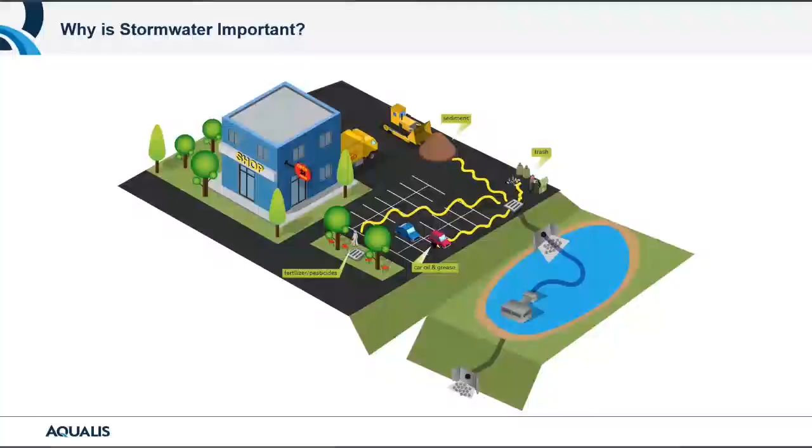So moving on, to kind of start at the baseline: stormwater regulations, what it means. This is why we're even paying attention to this. Here's a slide, an example.

Before this shop and parking lot were built, this was probably grass or forest of some kind. Whenever we disturb nature or the original landscape, creating impervious surfaces, rainwater no longer hits the ground and gets absorbed, or runs to the nearest stream, lake, or ocean without first picking up disturbed items on those impervious surfaces. Parking lots pick up a lot of oil and grease from cars, salt in the wintertime, fertilizer, and pesticides from nearby landscaping.

All of this flows downstream into our waterways and eventually gets recycled, whether going back into the water table or downstream to the streams and ponds we recreate in, or where we eventually get our drinking water from. So it's very important that we do our part, based on the design and intent by the municipalities, on filtering some of this water.

Another example here: when water hits these impervious systems, it runs into, in this case, a retention pond on this particular site. That water can get filtered a bit more naturally, then eventually outlet to the downstream river, lake, or ocean, and things get accomplished.

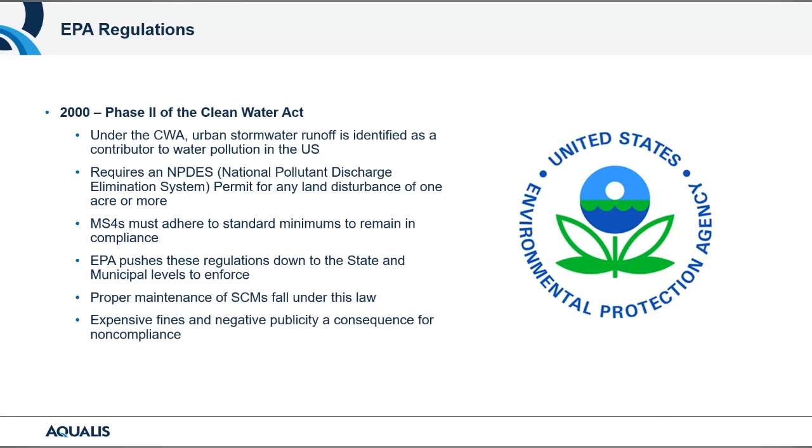Congress enacted, on November 6th of 2021, the Infrastructure Investment and Jobs Act, which, among a lot of different things, included some water quality stormwater funding. This is going to help municipalities with aging infrastructure, new technology, and research into their ideas regarding water quality and what's required.

This, to me, more than anything, spells out the continuing trend that municipalities tasked with enforcing these rules and regulations enacted by the Clean Water Act and the EPA will get a little more clout, a little more funding, to make sure local businesses and even private homeowners, HOAs, and others are complying with what they're supposed to be doing given their particular system.

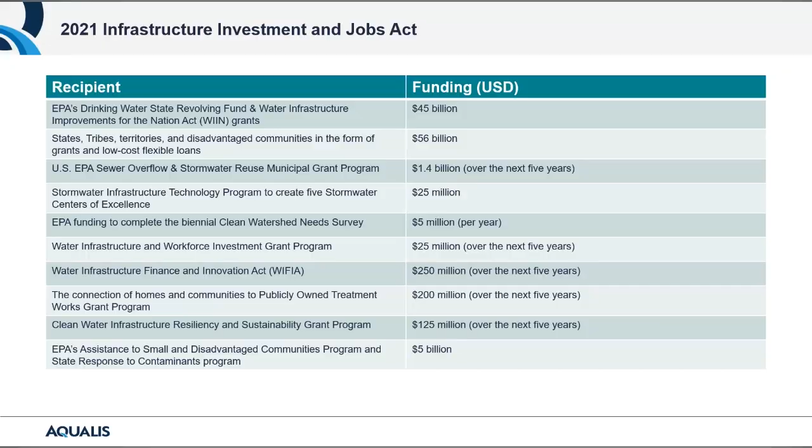So it's something we all need to be aware of. It's already starting to trend up, and that was before November with the passing of this act. I think it's going to continue to become more and more important as we move forward.

As we start to think about stormwater, here at AQUALIS we believe strongly in preventative measures. We're going to talk a lot about repairs and rehabilitations and what comes along with that, but it's the preventative maintenance that's key to us.

Having the right professional on site and doing what we can proactively to prevent larger items from popping up is the best way to reduce costly repairs and rehabs over time. A lot of us own a vehicle of some kind, and we use it almost every day, just like our stormwater system. If you're not changing the oil, rotating the tires, making sure your filters are clean, things are probably going to start to pop up. It's the same thing with stormwater in your system.

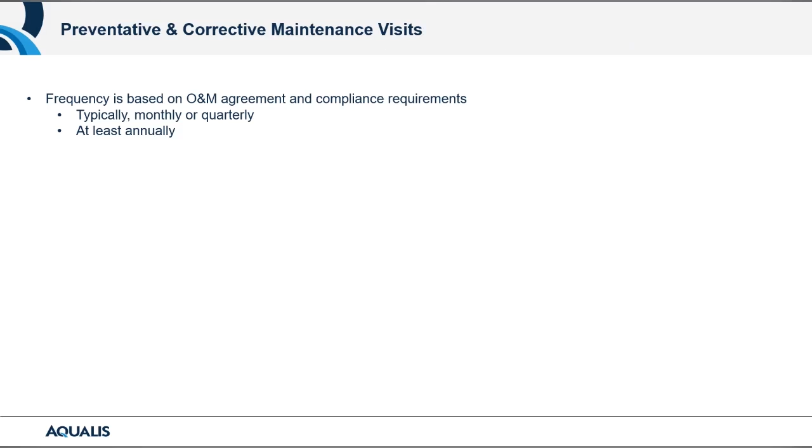Getting back to the EPA and the municipalities, when your building, structure, or property was built, there was an O&M agreement agreed upon with the municipality on the design of your property and how often it should be maintained and inspected, and what the minimum requirements are. A preventative maintenance plan makes sure you're adhering to that. You're technically required to follow it, though some municipalities enforce it more than others.

When you think about sensitive watersheds down in the Florida region, St. John's River, Chesapeake Bay area, and the Pacific Northwest, these watersheds are a little more high profile, and regulations are watched a little more closely than others. But the overall trend is municipalities are putting the stress on making sure you're compliant with your system.

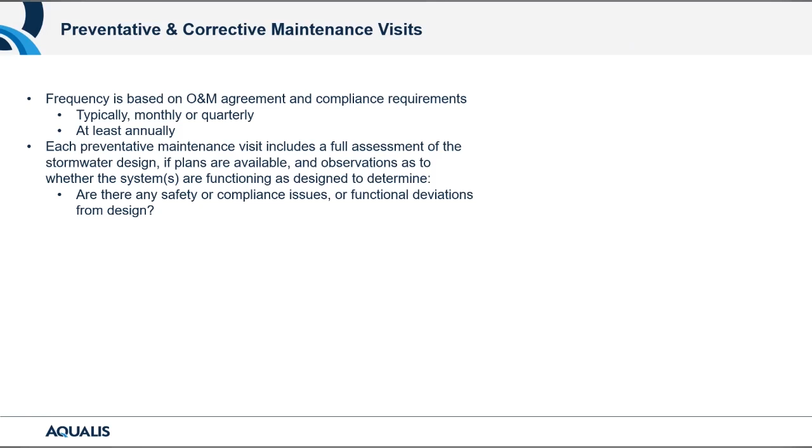During a preventative maintenance visit, we're looking for safety and compliance issues, potential hazards, and whether the assets are fully accessible and observable for an inspector. An inspection can happen just about any time from the municipality, and if they can't see something, they usually count it as out of compliance. So we have to make sure during preventative maintenance that all of your assets are visible and in good shape.

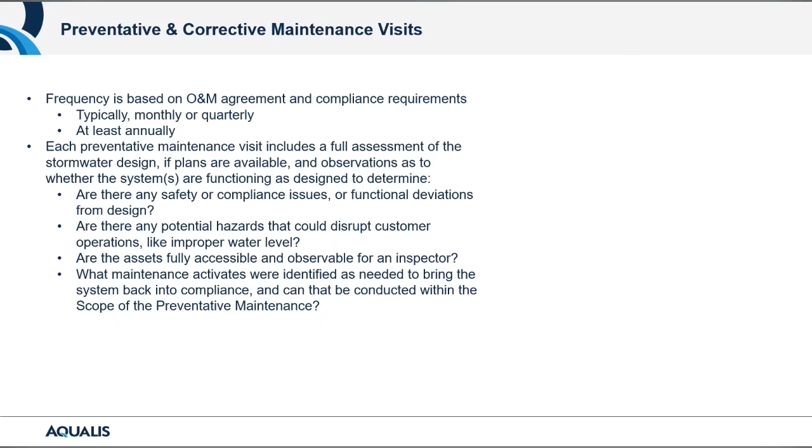And then finally, we document through reporting and pictures what may have been identified as out of scope or not in compliance, and report that to our customers and to you as property owners or individuals with a stormwater system, so we can make sound decisions on what to do about it and how quickly we need to move to ensure the system is moving water like it should.

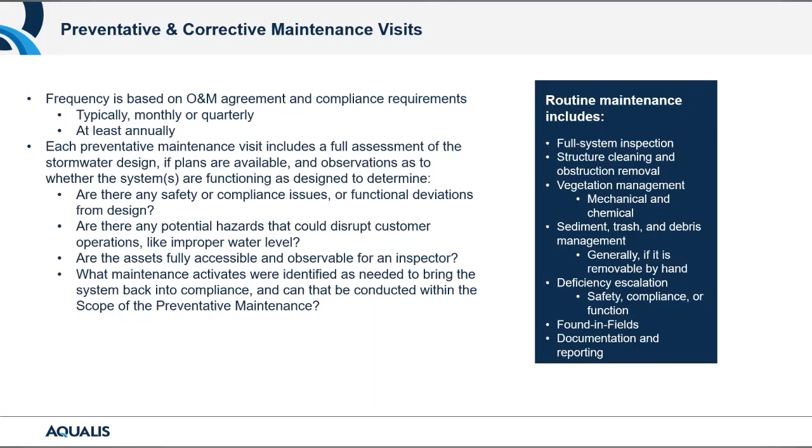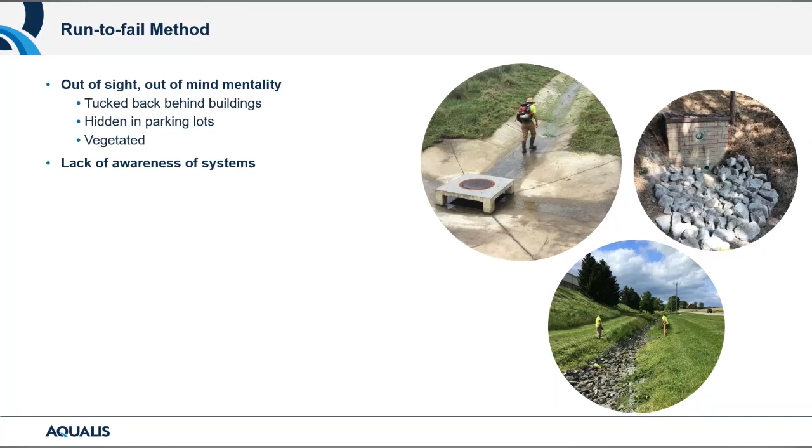Unfortunately, sometimes properties are handed down and information is lost in the shuffle, to no fault of anybody in particular, and the stormwater system might be out of sight, out of mind. You can even be unaware that part of a particular system is yours to maintain. A lot of this information is buried in real estate transactions from when the property was built. So step number one, as far as I'm concerned, is making sure you're aware of what lies within your property, what may lie outside your property that you're responsible for, and then keying in on that O&M agreement.

Your local municipality will have that agreement on file. You can reach out to a stormwater professional, like a company such as AQUALIS, to help track that down with your municipality, or reach out to the stormwater division of your local city or township, who usually have a copy on file so you can understand exactly what you're responsible for. Some of these systems can be tucked back behind buildings or hidden underneath parking lots, leading to a lack of awareness that you're even responsible for something.

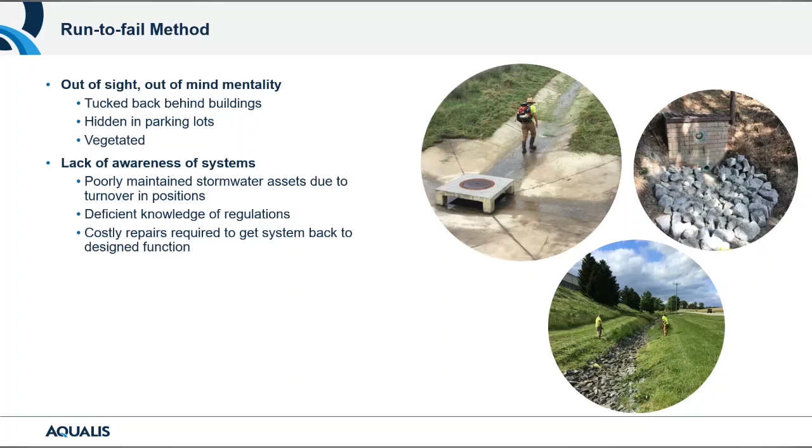We've helped a client recently down in Florida who had a stormwater pond that was basically an easement as part of their original real estate transaction. This pond is hundreds of yards away from their actual real estate border, but the language in the real estate deal says they're responsible for the maintenance, and they never did that. Not to anybody's fault, but just not being aware it was their responsibility or knowing what those regulations were. Unfortunately, when we get into these situations, there are sometimes costly repairs needed to get these systems back into shape.

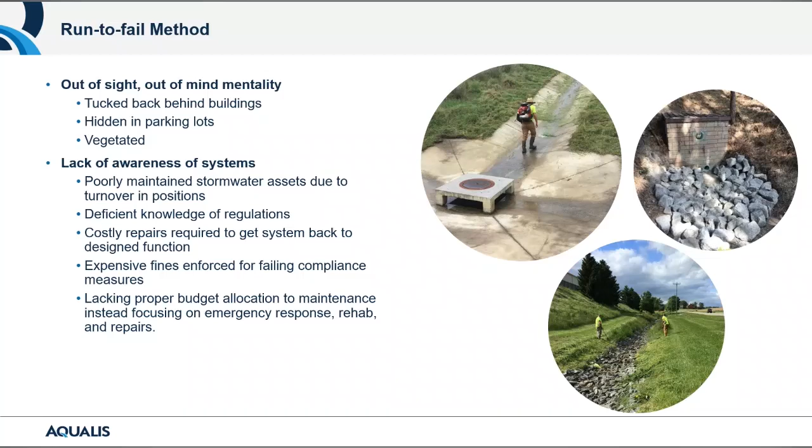Or what could happen is a notice of violation is submitted by the municipality, and an expensive fine or bad publicity can be issued to the facility or store, basically making you make sure you get it back in shape and things are functioning as designed.

A lot of times in this situation, you don't know when these costs are going to hit. I myself own a home, and I don't like big unexpected costs when it comes to things that should work for a long period of time. So I know a lot of our clientele don't like that either. Unfortunately, when you run that run-to-fail investment method, those unknown larger costs do happen.

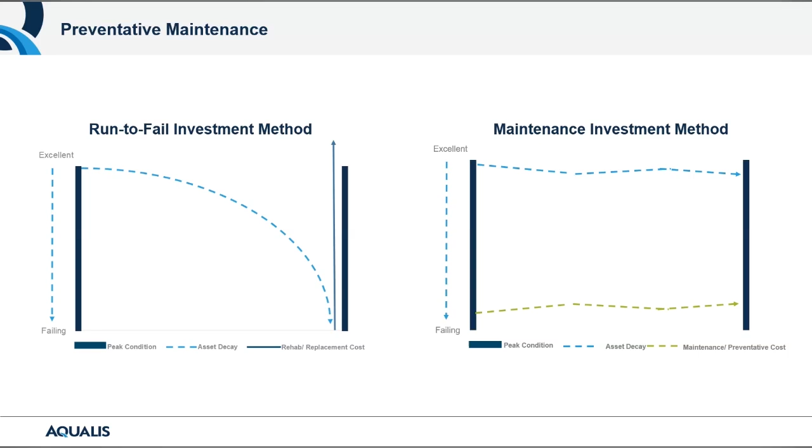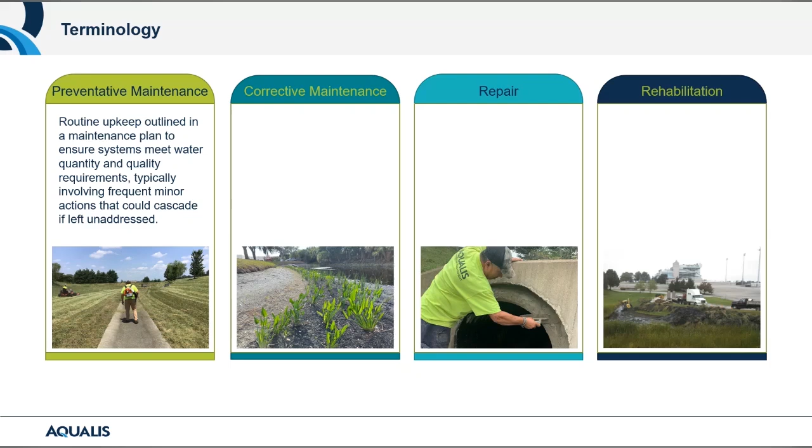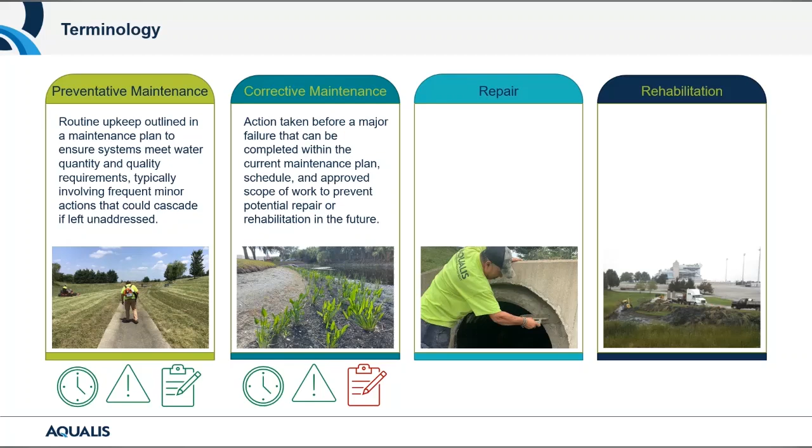Part of our preventative and corrective maintenance is trying to take care of issues as soon as they start. Unfortunately, just like owning a car, repairs are going to happen—you may hit a pothole and bust up a tire, you're going to need new brakes eventually. Things like that are going to happen. Repairs are typically isolated incidents within the stormwater system, smaller in scope—it may just be one part of the system that needs a little TLC.

At that point, during a preventative maintenance visit, we would identify that, come back to the customer, and present our proposal for fixing it, along with the pros and cons of what you need to do, or what a regulator might find if they see it, and give you the best plan of action from there.

And then lastly, rehabilitation is more of a large scale non-compliance issue. Sometimes there are multiple repairs within a rehabilitation. As we see in this picture, that pond being rehabilitated was full of sediment. We're removing that sediment, and there are structures within that pond, inlets, outlet control structures, that may need to be repaired along with the pond itself.

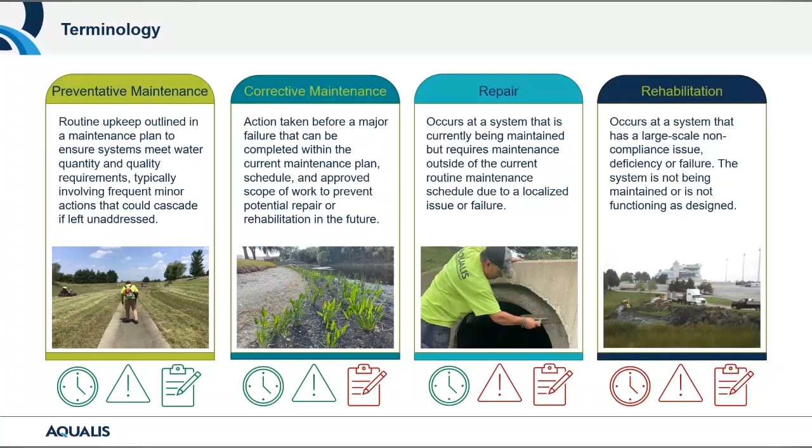But as far as terminology, this is what we want to cover. A lot of these terms are overlapping. It's not a clear cut, Webster's dictionary definition of everything, but kind of the industry jargon that we use day to day focuses on those items, and is something we definitely want to stress and have you understand by the end of this presentation.

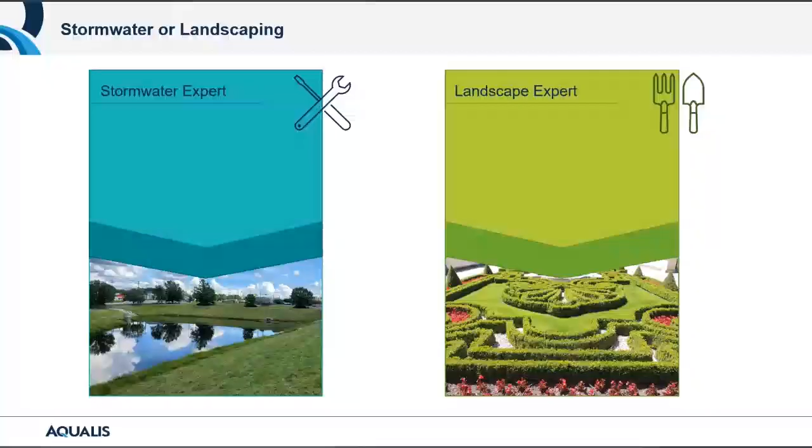But before we get into actual repairs and some examples, we want to focus, as we talk about preventative maintenance, on getting the right expert on site doing your work for your stormwater system. We have a comparison here between the stormwater expert and landscaping expert. A certified stormwater professional is going to understand the multifaceted engineering, regulatory, and ecological complexities of that particular system.

Regionally, things can vary. The stormwater work we're doing in Arizona right now varies greatly from the stormwater work we're doing over in Florida. Obviously two different climates, both hot, but a lot of water differences between the two. Having that expert who understands the intricacies between those types of systems is key. I wouldn't want to take our Arizona crew and just throw them into a situation down in Florida. They could definitely learn it, but having that local knowledge regarding these systems and how to maintain them is something a stormwater expert keys in on.

Really, the landscape expert has professional knowledge with vegetation management, but it's more aesthetic, it's more about just creating that safe outdoor space. And this is nothing against landscapers, we do landscaping work, we have them on staff, we love them, and they do great work. But when it comes to stormwater, we do feel that having a stormwater certified expert on staff is leaps and bounds better than just anybody running in.

As you see in the lower left-hand picture, there's a stormwater pond, and yes, probably anybody could go by and mow that grass, but there are particulars of that system that we want that stormwater expert to key in on as he's mowing that grass, like how high to mow it, and how low towards the water to mow it, where maybe a landscape expert just wouldn't have that knowledge, to no fault of their own.

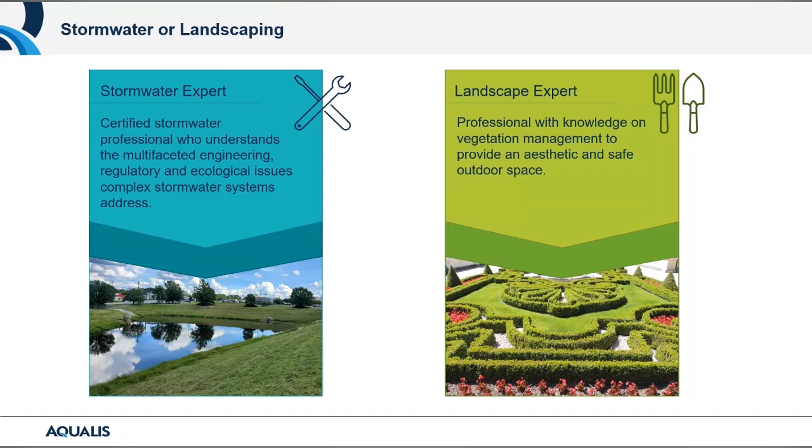But again, keying in on the stormwater professional, even when it comes to repairs or corrective maintenance, before breaking ground, we're going to make sure we understand the municipal compliance behind what we're doing as far as the repair. The historical data is key. A lot of our clientele we've been working with for almost as long as we've been in business, over 20 years, and with that we get to see the changes of a site, get to know the intricacies, figure out what's working, what's not working, and make those right suggestions, and really just evaluate the big picture.

If we come across erosion, not only is it about fixing the erosion, but why is this area eroding? Let's find the root cause and make sure we take care of that so it doesn't happen again. The same can be said with sinkholes, which I'm sure you guys have all seen in parking lots or elsewhere, but a lot of the time with sinkholes, something's causing that subsurface grade to move, and a lot of times it's water, and it's often very stormwater related. So we want to make sure we're looking at that big picture and suggesting the right repair. And then during stormwater projects, I'm sure you've all seen large construction projects with silt fences around the area.

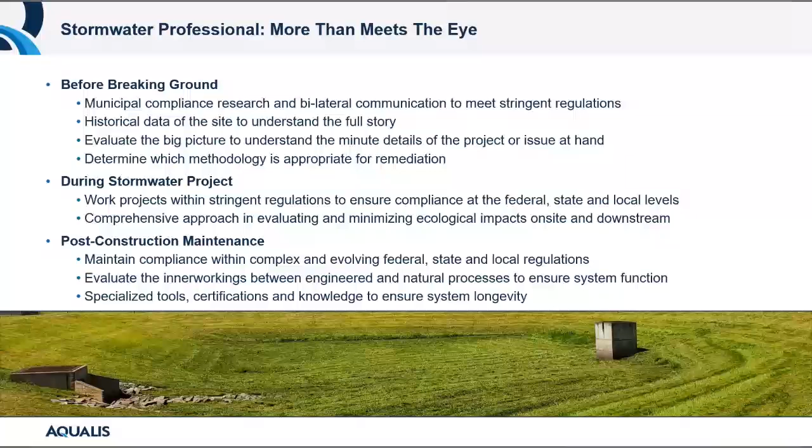A quick example case study. We had a situation with a customer of ours where the landscapers by mistake got into the stormwater pond, and as you see in the upper right-hand picture, they actually cut the grass a little too short for that storm, and that's actually a stormwater pond berm.

This is a detention pond that can be dry like you see there now, or fill up with water. And given the grass was cut too short, it actually caused some erosion and washout with the way the water level was rising and decreasing. You can see that inlet in the upper left-hand corner picture, a perfect round circle.

They hit this area with some herbicide, taking care of some invasive weeds and stuff that were popping up, but at the same time, this caused some erosion.

This is an inlet where stormwater comes in. We need it vegetated. We definitely don't want weeds and invasive species in there, but we definitely want to maintain that vegetation around there, along with the riprap you see, to make sure that we slow that water down and things are kept in shape and stabilized. So we were able to come in and take care of this for this particular client.

Adding signage is a big thing that you can do for pretty cheap around your property. Making sure that landscapers, or like as we encounter here in the upper Midwest, snow plows, sometimes when you're snow plowing a parking lot, just dump it into the stormwater pond on the slopes.

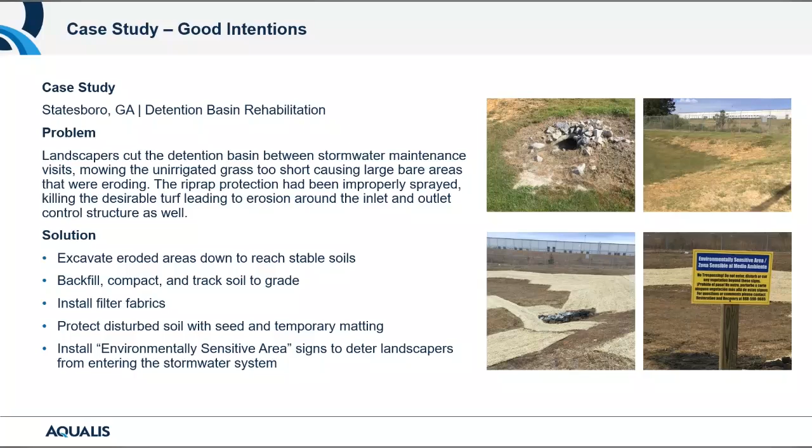Moving on, we want to continue with repairs. We talk about the fundamentals of a repair. Again, the repair is usually an isolated incident within your stormwater system, or just a small handful that we find during preventative maintenance.

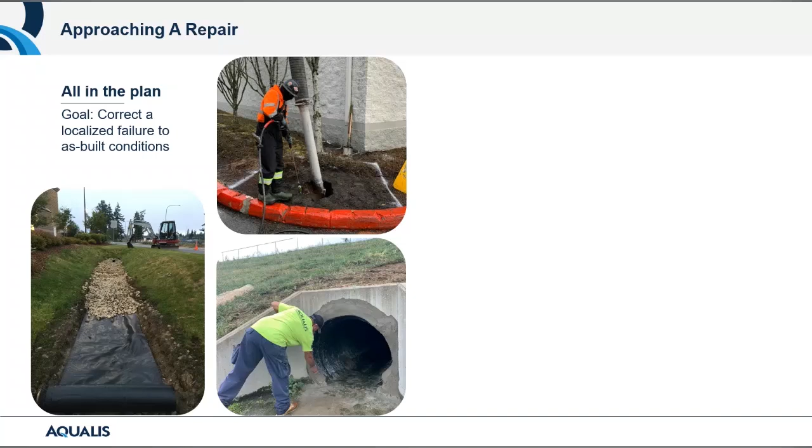Or maybe sinkholes pop up, and sometimes those things are found by customers, residents, property managers, or whomever, and those items typically need to be fixed pretty quickly. Again, the goal is to correct that localized failure to as-built conditions.

When we think about a repair, it requires careful preparation and planning, determining the best steps. That center picture on the top, we're actually repairing that drain you see on the building in the background. This is a roof leader, so rainwater hits the top of this building and runs down that roof leader.

It goes underground to the nearest stormwater catch basin, and that roof leader was not draining correctly. We ran a camera inside that pipe and found it was full of crud and had collapsed somehow.

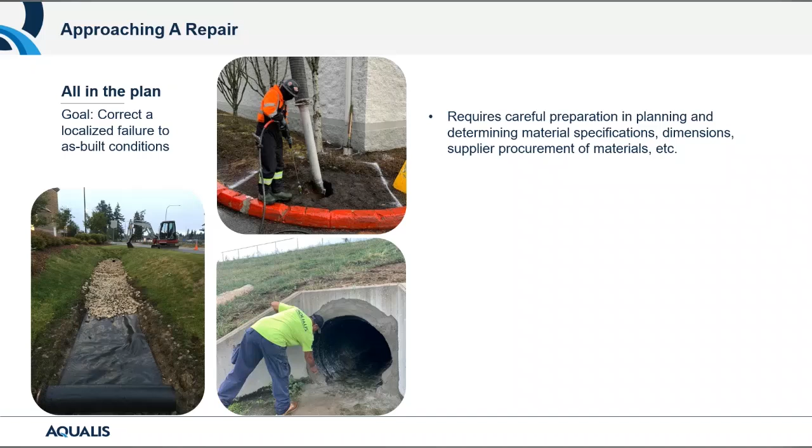So here we are hydro excavating to make sure we're getting down to that roof leader very carefully, because there were a lot of conduits and other items around that area that we didn't want to strike with a mini excavator bucket or anything like that. Being mindful of other items around your repair areas that may either be contributing or get in the way of a potential repair is something we want to focus on.

As I mentioned, CCTV, we'll get into that later, but it's basically closed circuit television. We're able to find and take a look inside structures via closed circuit television to ensure we're proposing the correct repair, and to ensure during that repair process that other system components are not impacted.

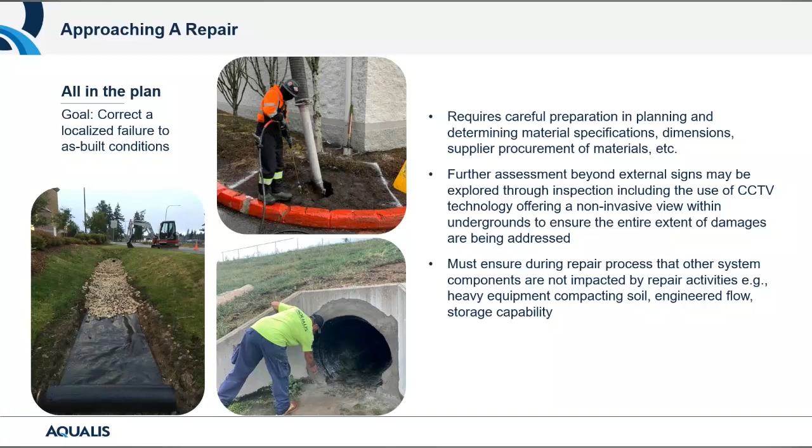If we're working on an outlet of a pond and we need that outlet area dry, we need to have a plan in place for if it happens to rain during that week of work and rainwater starts flowing into the pond. Where's this pond going to flow to? Does it have enough capacity to hold, or do we need to route it somewhere else temporarily as we do the ultimate repair? These are items we're always thinking about during stormwater repairs.

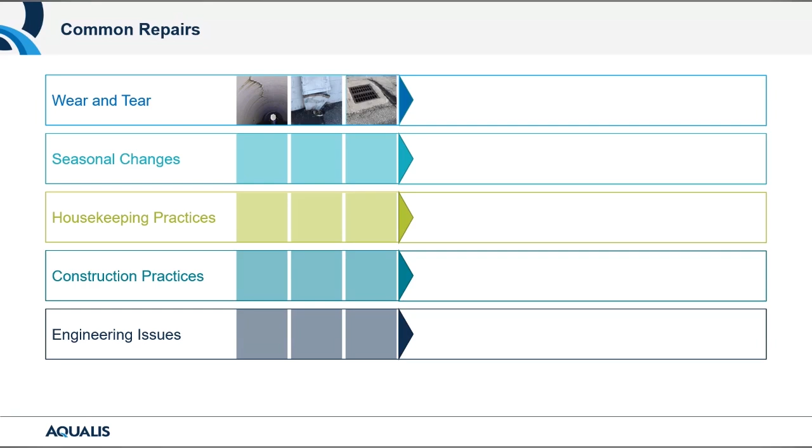We talk about common repairs, wear and tear, cracks, separations. We do a lot of catch basin work, especially around the upper Midwest, the Northeast, anywhere where there's a lot of freeze and thaw. There's a lot of stress on the catch basin around your system. Seasonal changes, like freeze and thaw, or simple as that left-hand picture of leaves covering your catch basin. If not recognized, it's not something we can really prevent, leaves are going to be shed from the trees they grow upon. But making sure during stormwater preventative maintenance visits, or just general housekeeping throughout your parking lot, even by the property manager, those grates stay nice and free and clear so stormwater can move as it should.

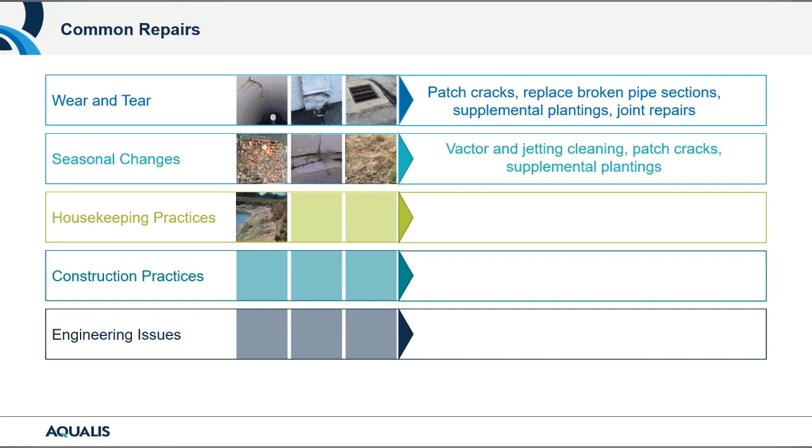I touched on housekeeping practices. One of the big things is trash. We remove a lot of trash from stormwater systems, just about anywhere. With most of our work being done in the retail world, things get dropped, things get missed when they get thrown away. A lot of these have a tendency to end up in the stormwater system, whether through wind or flow or whatever. Keeping up those housekeeping practices on your own property is a big item we typically see a lot of, and it can cause downstream issues. It would definitely be pointed out by a regulator if they saw too much trash for a particular area. Some will build up with time, and they definitely want to see that removed periodically.

Construction practices we run into - I'd say the example on the left, the paving company basically paved over the edge of that catch basin. Not only do they probably get things down inside that catch basin, they should protect that when doing that type of work, but it also makes maintenance and removing that grate a lot tougher moving forward.

We see a lot of issues with using heavy equipment in the bottom of a pond or the bottom of a swale that's meant to receive water and let that water infiltrate. Running around with heavy equipment in there during construction only compacts the soil and prevents some of that infiltration - we see a lot of that. It's something your stormwater professional, or at least having them consult during this work, would be a good idea and can be preventable.

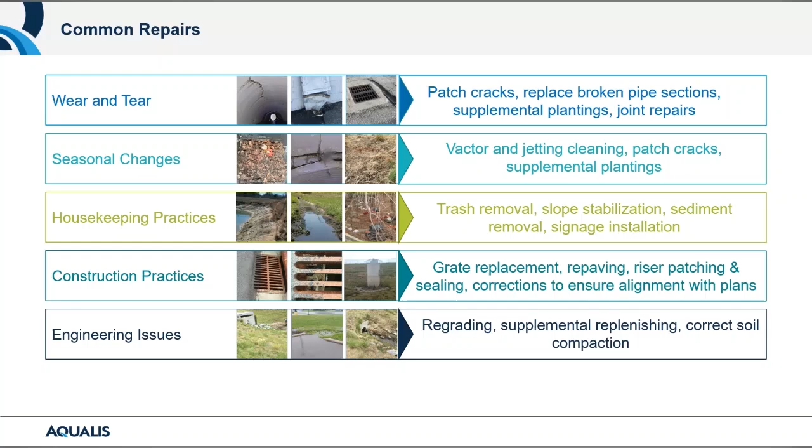So patching and replacing - we often run into this when thinking about repair items. More times than not, depending on the age of the infrastructure, the severity of the damage, how often this is being repeated, we can make a suggestion whether to patch or replace. There's always that fine line, especially with things that are cracking. Is it worth spending the small amount now and maybe dealing with it a year from now if that patch doesn't hold? We can consult with our clientele and make those suggestions based on experience.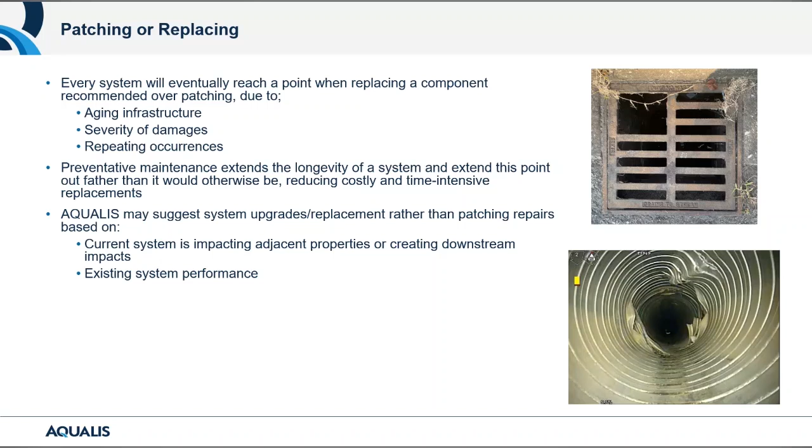Sometimes we may suggest an upgrade or replacement rather than a patch. It's important to note that you cannot get into a system and upgrade it so much that you're deviating from the original design - anything outside the original design needs to be permitted, and I want to make sure everybody comes away knowing that. Sometimes using a different material, but at the same size to make sure the water can flow at the same rate as it was designed, is acceptable.

When we talk about system upgrades or replacements, it's definitely looked at as a maintenance item in terms of repair, and we're just bringing that system back to original design. Sometimes it's using a little bit different product, and we'll get into some of the tech advancements later on. But here's an example, a case study of a catch basin.

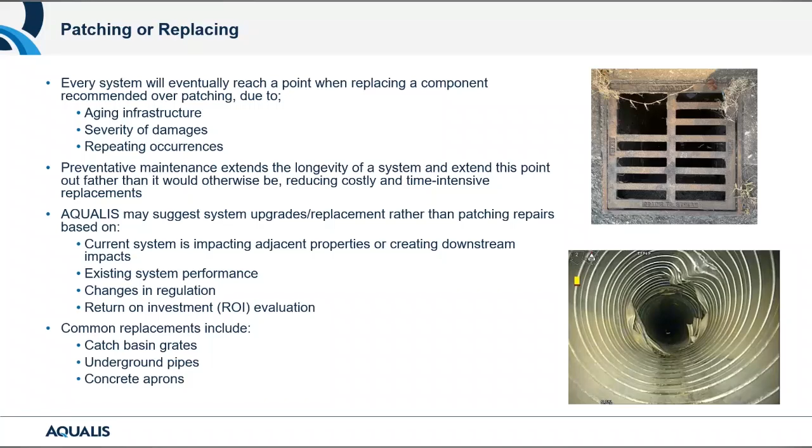You're looking inside a catch basin that may be in your parking lot that normally has a slotted grate on top. Stormwater runs throughout the parking lot, through the grates, into this structure and through these pipes. But you can see in the before picture the missing concrete there, and the reinforcement metal strands. It's just deteriorated with time.

I don't know where this picture was from, but it was probably from the upper Midwest, where freeze-thaw compounds that. In these situations, a lot of times sinkholes are nearby, and they can be 4 or 5 feet away. But when that subgrade is lost through the deterioration of these riser rings, you can see it's ended up in the bottom of this catch basin. It creates a void underneath the asphalt or adjacent area, and those areas will sink over time.

So making sure we're repairing and getting to that root cause, here we installed some HDPE riser rings to get that catch basin back to the proper grade and ensure a long-lasting repair. That's just something that we do a lot of.

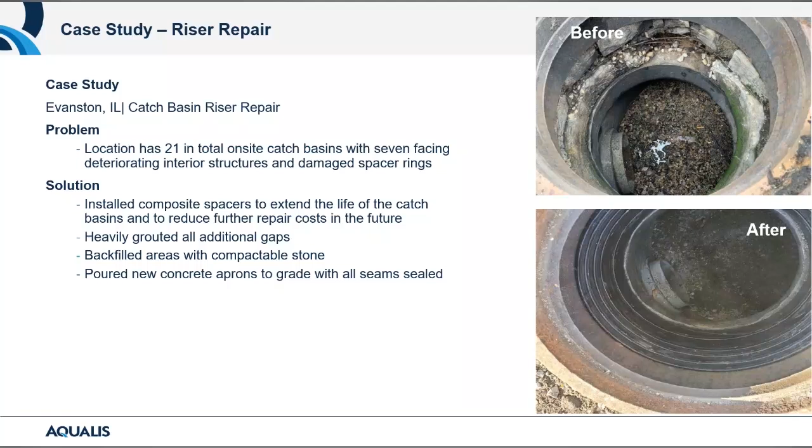I'm sure you've run into it if you're a property manager or business owner, especially in the freeze-thaw areas of the United States. It's something we run into a lot and repair a lot. It's kind of like brake pads for your car - it's going to happen. The tech advancements I'll talk about later have helped extend the life of these, but these things take a lot of abuse. A lot of rainwater flows through them, so it's something we come across pretty commonly throughout the United States.

So we've talked about repairs, we've talked about corrective maintenance items, rehabilitation, and some of the fundamentals going into this.

More times than not, you're not going to want to do a rehabilitation to your stormwater system by choice - sometimes it's necessary. Sometimes you buy a property that needs a little love and care to get it back to original design, and a rehabilitation is needed. But the goal here is to restore that neglected system back in entirety, to its original compliance standards and design.

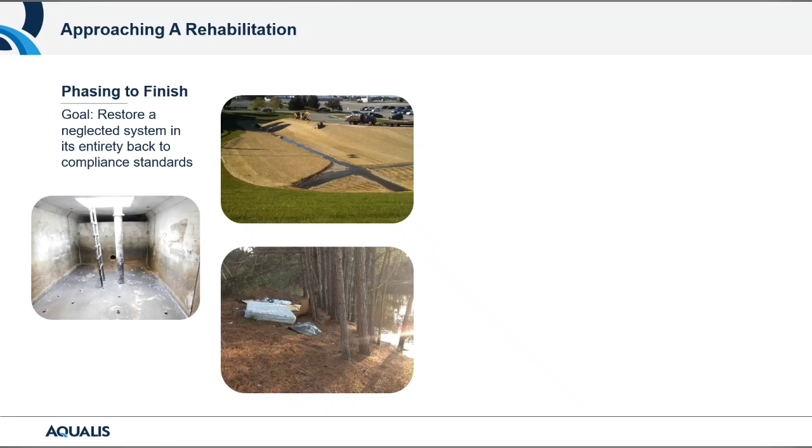When I think of a rehab, I think of the example in the top picture, the pond being totally regraded, including in the rehabilitation those channels where you see the water standing. There's inlets, there's outlets there. In the left-hand picture, inside that vault, that's actually a stormwater vault underneath the parking lot, and water flows in there.

When we think of repairing one of these, a lot of times these systems unfortunately get into an out-of-sight, out-of-mind situation. A lot of property owners sometimes don't even know they exist, and that water needs to be filtered. I've got a slide that shows how that looks in there - normally a much larger scale repair involving many different repairs within, if that makes sense.

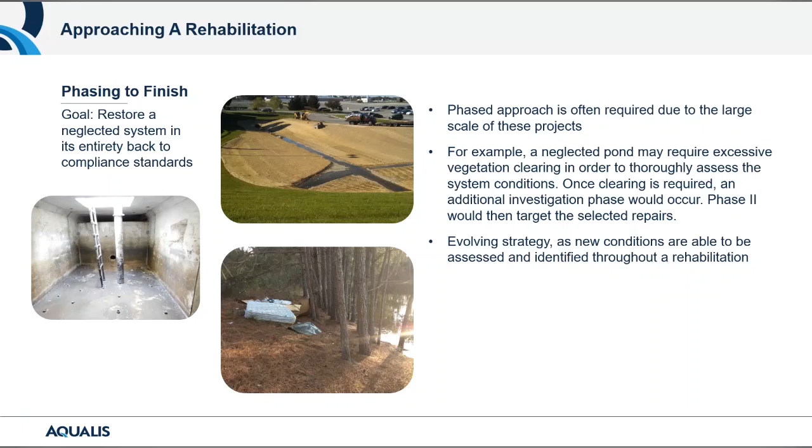A phased approach often works for us when we're thinking about a rehabilitation. A neglected pond could literally be a jungle if we're dealing with them in Florida, and a lot of times we can't even decipher what's in there, or how the structural assets within are. So taking that phased approach to clear first, and then do another assessment once that part is done, has worked well for us.

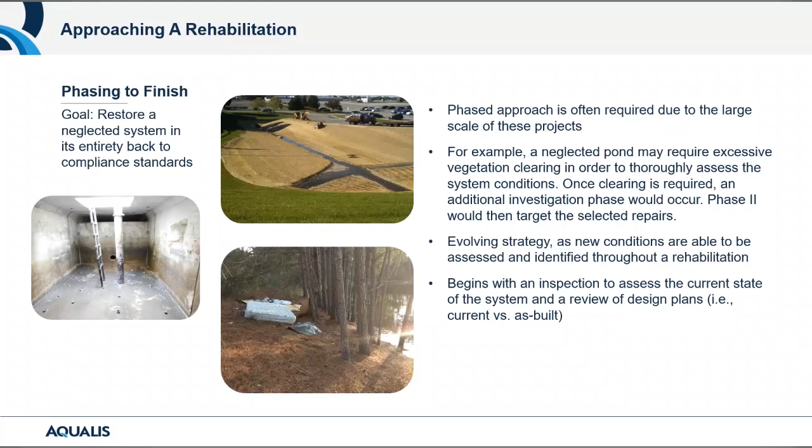It usually begins with an inspection to figure out that current state. Unfortunately, a lot of rehabs are initiated by municipalities that find that pond you may not know you're responsible for, or that underground vault, and we want to make sure those areas are taken care of.

Getting into common rehabilitations, that left-hand picture is of a vault full of sediment - large-scale trash removals, aging infrastructure. The car example: at some point your car is going to fail, you're going to get too many miles on it, and maybe need a new car or get that car totally redone.

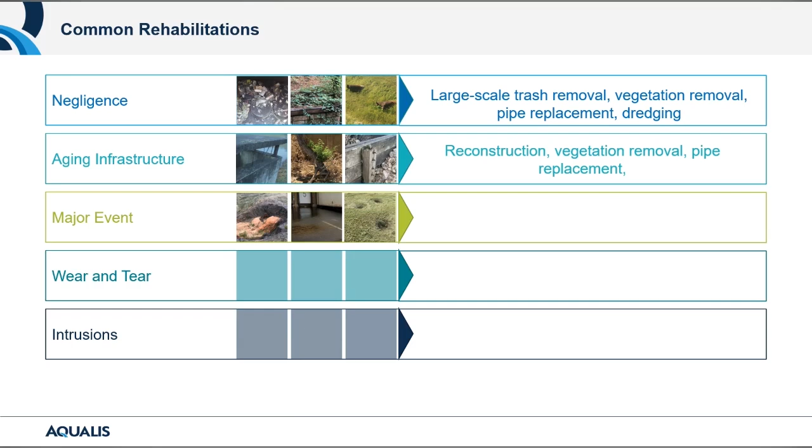It would be the proper step, and sometimes that's the right way to do it in the stormwater world. We hear about global warming and major events - hopefully anybody in Kentucky here is safe from those recent tornadoes. These major weather events that seem more and more common are definitely putting more stress on stormwater systems. The Pacific Northwest has been receiving a ton of rain lately, and it just seems to be more common nowadays. I don't know if that's global warming or not, but there's something to be said about the commonality of these things. We also talk about intrusions and invasive species.

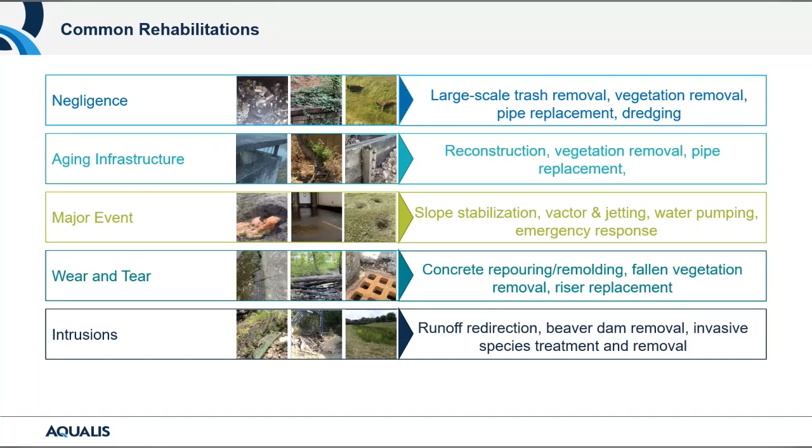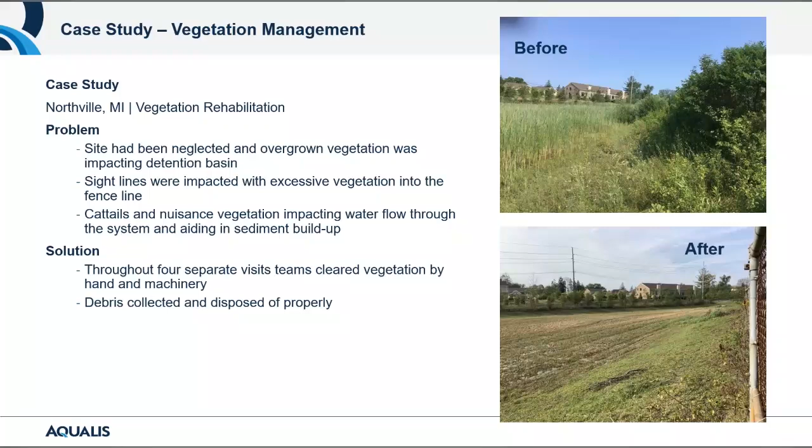These systems need to be maintained. If you allow too much sediment to get into these vaults, the filters themselves will clog up too quickly, causing costly repairs. It's not the cheapest item in the world to make sure we're inspecting and cleaning those periodically, but it's certainly a lot cheaper than having to go in there and replace everything, especially prematurely.

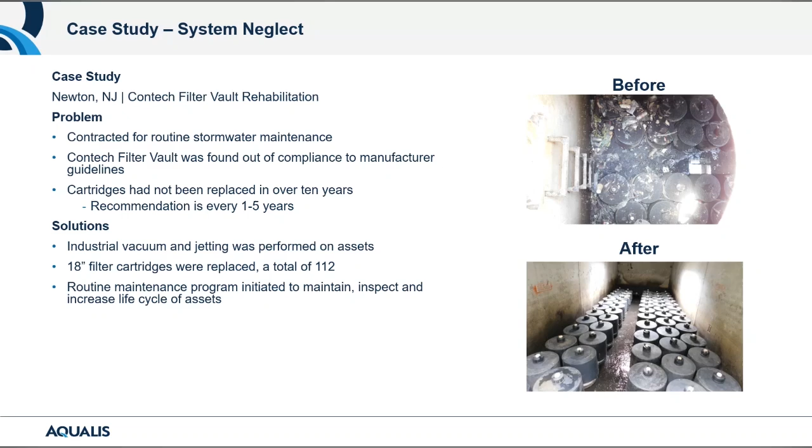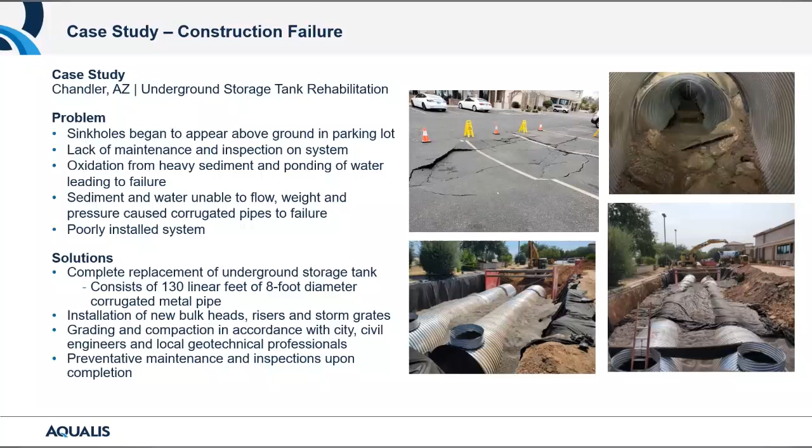These systems are designed to last 70 years. This one lasted 20, and that was due not only to construction practices but lack of a preventative maintenance plan - cleaning that pipe, making sure there's no sediment further compounding the lack of water movement in there. That could have made this system last way longer than it did.

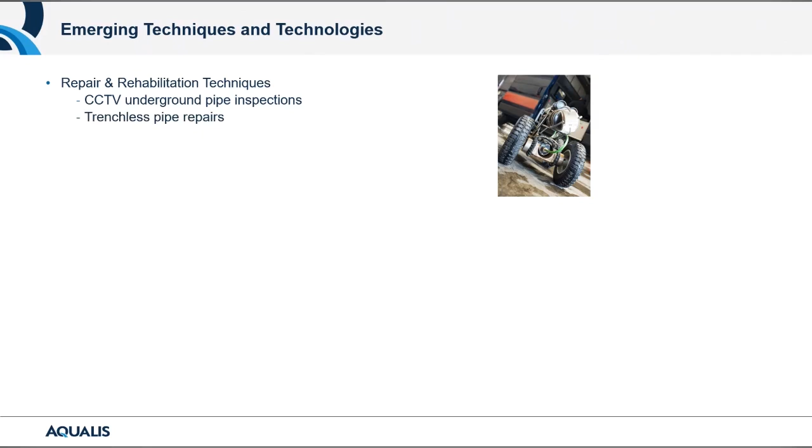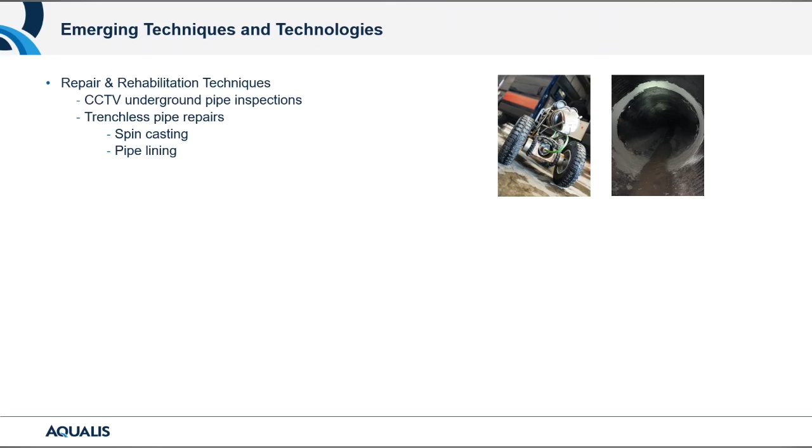Moving on, I want to touch on new technologies. We touched on CCTV, closed circuit television. We talk about trenchless pipe repairs - spin casting, pipe lining. The less invasive we are, the better - in that last rehabilitation example, we had no choice but to dig in from the top. But there are new technologies now where we can basically line pipes with smaller pipes while keeping the flow the same, or spin cast a product within that damaged pipe without digging in from the top. We actually just completed a project in North Carolina for one of our customers - it was a big success, easy in, easy out, as far as some of those emerging technologies and repair methods.

Sox slope stabilization - you've all probably seen this on a golf course and probably didn't realize it, but they use it a lot near ponds with water levels rising and lowering, which deteriorates the pond edge. Sox slopes utilize fabric and material and grow vegetation within to make sure those pond barriers last a long time, especially since that pond receives a lot of rainwater and drains out, constantly up and down.

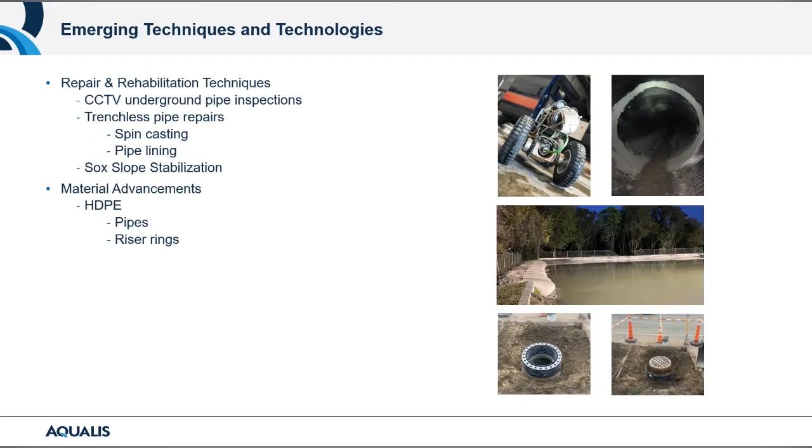We also talk about material advancements. HDPE, high density polyethylene, is what that stands for - it's basically the black plastic pipes you've seen. They're now starting to make riser rings, as seen in our catch basin example.

For concrete, we see a lifespan of 10 to 12 years. According to this, HDPE and some of the new technology as far as riser rings are supposed to last 50 years plus. So it's definitely putting technology to use on some of our repair methods.

And there's even monitoring and tracking nowadays. These are more on the forefront, not used as commonly as some other items, but RFID, radio frequency identification, can have your stormwater assets tagged on site, making sure you know where everything is. Storm sensors can monitor water levels of certain things in real time.

Continuous Monitor Adaptive Control is what CMAC stands for—almost like a dam to a river. You can basically watch for weather patterns and release a little bit more stormwater if you have a pond with a CMAC control on it, allowing more capacity if you're expecting some heavy storms moving forward.

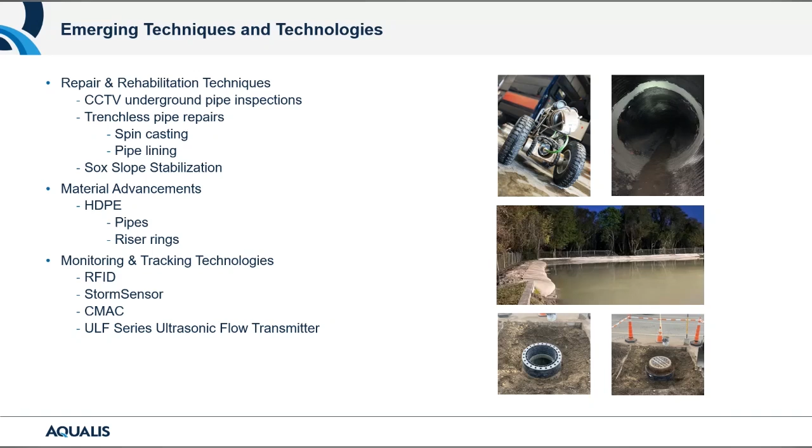So a lot of things are coming online, and we try to implement those when they make sense for a customer, depending on regionally where they're at, and if it fits within the budget. It's some exciting times, and it allows us to be more efficient in the field and in getting these repairs and rehabilitations done.

But as I finish up here, actions you can take: first, make sure you know what your stormwater assets are on your property and facilities, and have that O&M agreement—that operation and maintenance agreement—from the municipality. Know what you have and know what you need to do with it by law, that would be the first step.

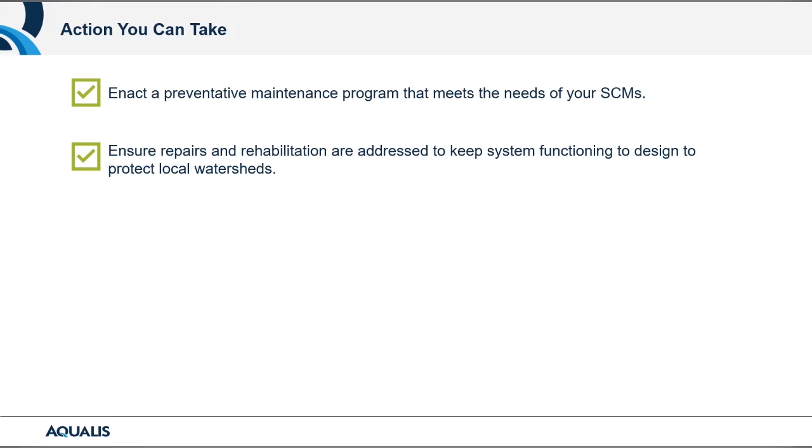And then, again, stressing that preventative maintenance program to meet the needs of your SCMs. Ensure the repairs and rehabilitations are done, and make sure your stormwater system is operating as designed.

Part of the preventative maintenance program often meets the requirements of the O&M agreement as far as annual inspections. It may make sense to do 12 visits a year on a stormwater system, but the O&M agreement may only require 4. You're kind of getting the best of both worlds—keeping things in compliance and ensuring your system's in good shape moving forward.

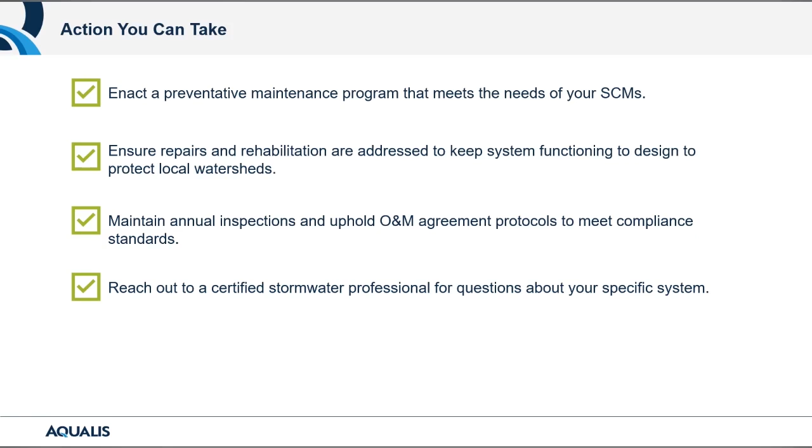And then finally, reaching out and getting a trained certified stormwater professional on site to help you out and consult with you if you need help. Companies like AQUALIS would be happy to help any way we can, and utilizing the expertise of a stormwater professional when it comes to rehabs, stormwater repairs, and preventative maintenance is highly advised and can pay dividends way down the road. That's really all I had.

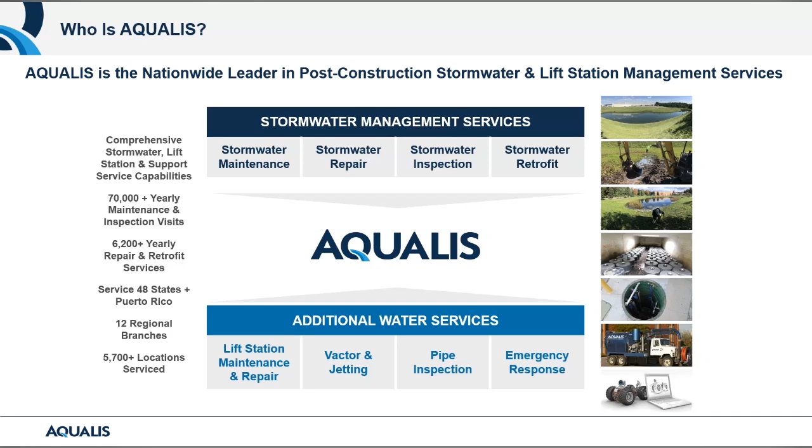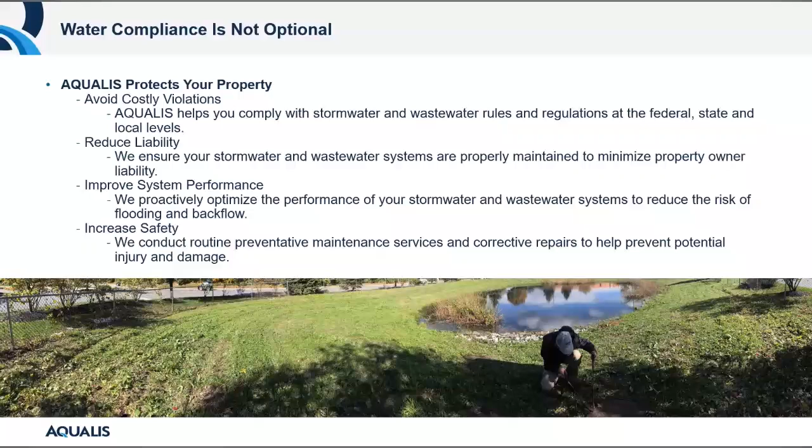Our guys in the field are definitely some of the best in the industry. They have way more certifications, some of which I can't even pronounce, but I know our crews have them and we utilize them day in and day out. We're nationwide, we've got the certifications, and we've got the experts on staff, both in the field and managing those in the field.

I cut my teeth in stormwater when I got into the facility maintenance side of things after school, and I've always had a soft spot for this kind of work. I love the outdoors, love to fish, and I know the role we're playing as a company, and as you guys are as property owners, property managers, and engineers, you're doing good for the environment. We appreciate you doing good things for your property, your residents, your guests, your customers, and the environment as well.